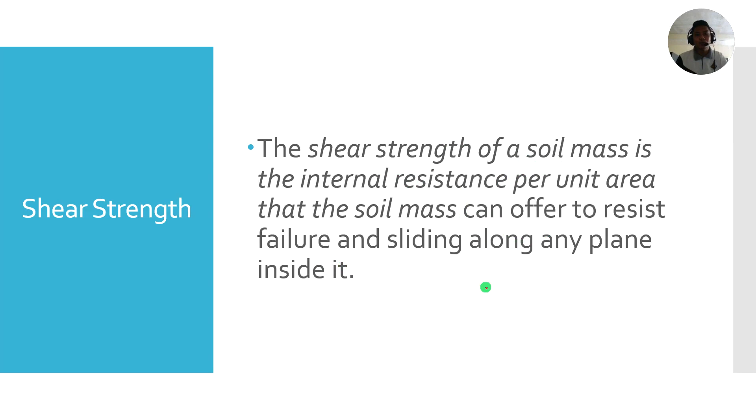I know you're familiar with shear stress. The shear strength, particularly in a soil mass, is the internal resistance per unit area that the soil mass can offer to resist failure and sliding along any plane inside it.

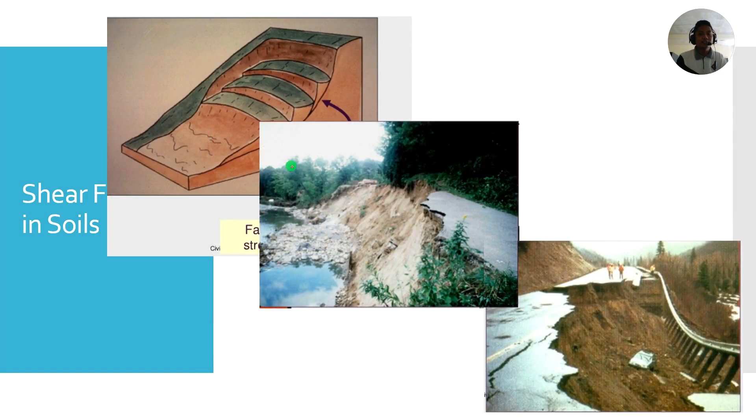These are the types of failures due to shear stress, such as landslides. The shear strength of the soil is a major factor in this phenomena. From the definition itself, it is the failure and sliding along any plane inside a soil mass, so there is sliding that happens in the soil mass.

The same way with structures built on soil, there is also an effect if that soil has a low bearing capacity. So shear stress again is a major factor on which a structure will fail due to bearing capacity.

Shearing stress pa rin ang magte-take effect sa soil. Magkakaroon ng sliding dun sa surface or dun sa underneath ng ating structure. Hindi man na-compress yung soil, depende sa type ng soil kung saan itinayo ang structure. Kung nag-fail due to bearing capacity, may tendency na magkaroon ng sliding sa surface ng soil mass.

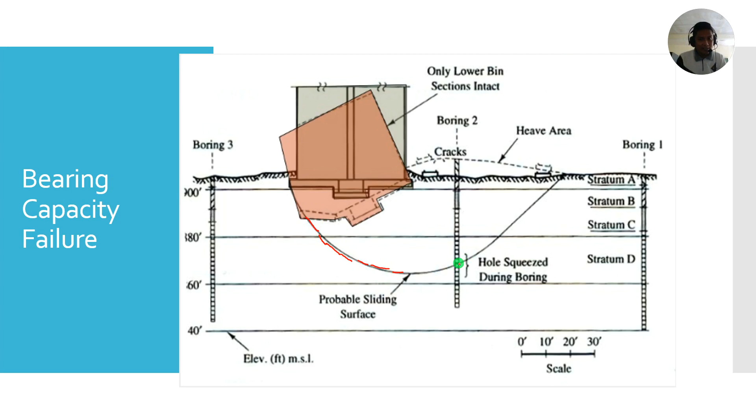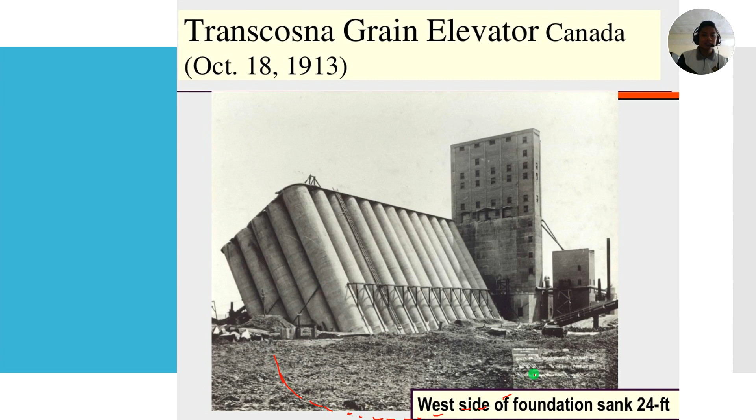So here's an example of bearing capacity failure. Shear stress failure siya. Nag-tilt itong building dahil nagkaroon ng sliding dun sa soil mass underneath this structure.

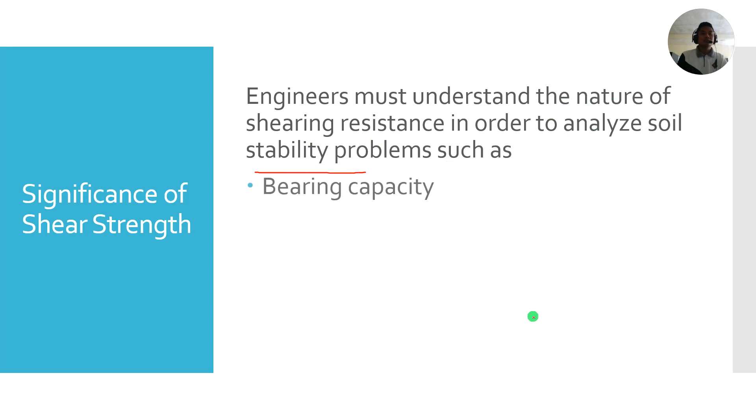Significance of shear strength: engineers must understand the nature of shearing resistance in order to analyze soil stability, such as bearing capacity, slope stability, and lateral earth pressure on retaining structures. Napakahalaga na maintindihan natin ang concept ng shear strength kasi essential siya sa paghahanap ng bearing capacity, ng slope stability, at sa pag-design ng mga earth retaining structures, kasama din yung pavement.

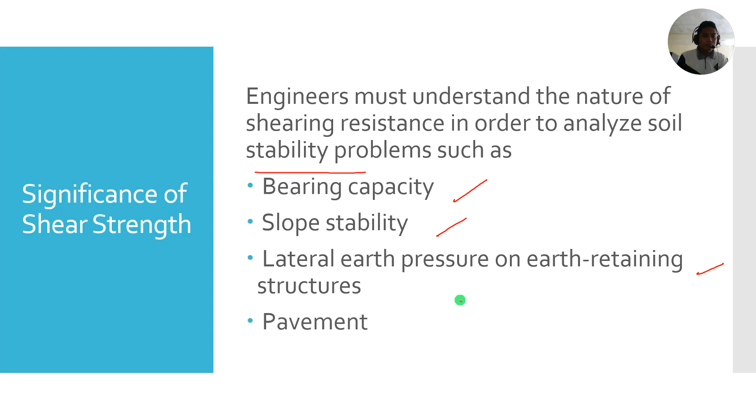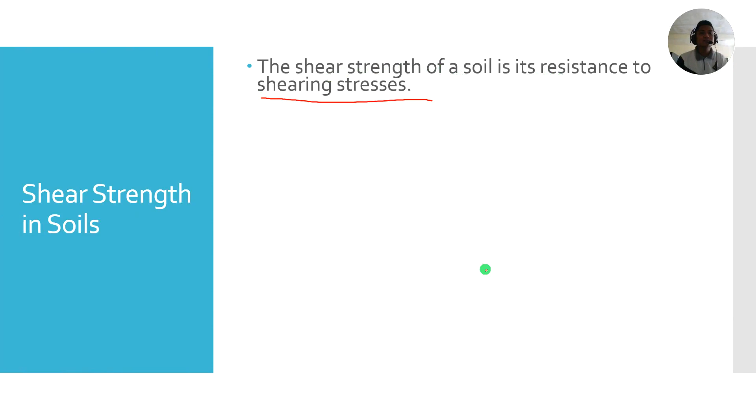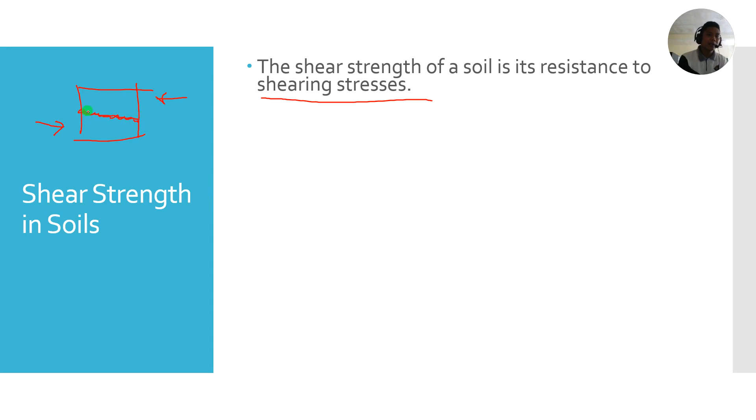Shear strength of soils: the shear strength of a soil is its resistance to shearing stress. Kung meron tayong force applied on an object, that causes a plane parallel to these forces to slide. Yung area na yon na parallel dun sa force, yun yung under sa shear stress.

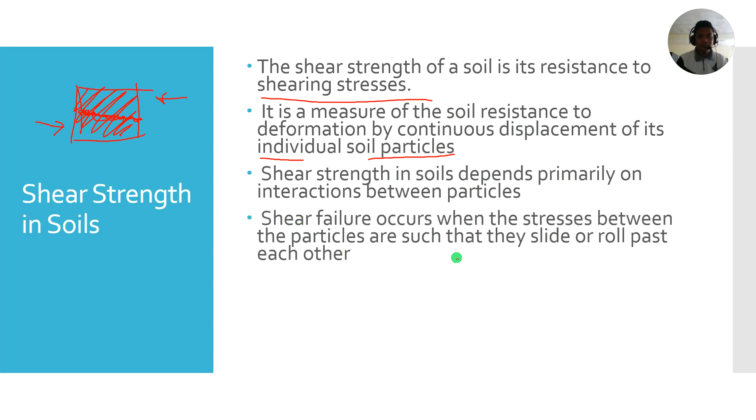Ganun din sa isang soil mass. So if this is a soil mass, the ability of the soil to resist shear stress is your shear strength. It is a measure of soil resistance to deformation by continuous displacement of its individual soil particles. Shear strength in soils depends primarily on interactions between particles, and shear failure occurs when the stresses between the particles are such that they slide or roll past.

As you can see in this figure, shear strength depends primarily on the interactions between the particles. So say these are the soil particles, there is interaction between them. But if it reaches the maximum shear strength or shear force applied on this soil, shear failure may occur, when the stresses between the particles are such that they slide or roll past each other.

That means they will slide on each other, in opposite directions within the soil mass, so that a layer forms between the soil mass where it will slide or split the soil mass.

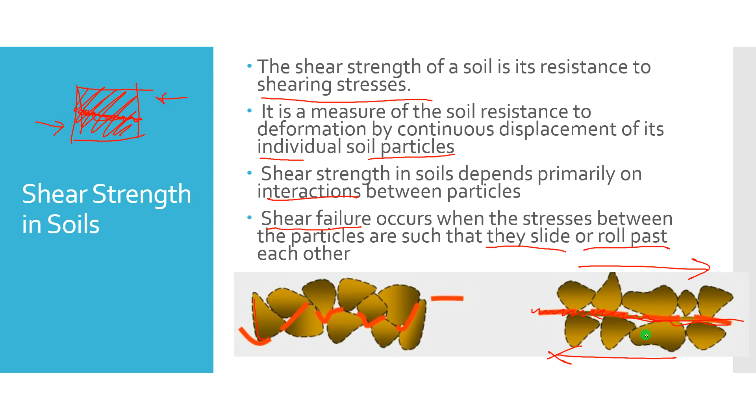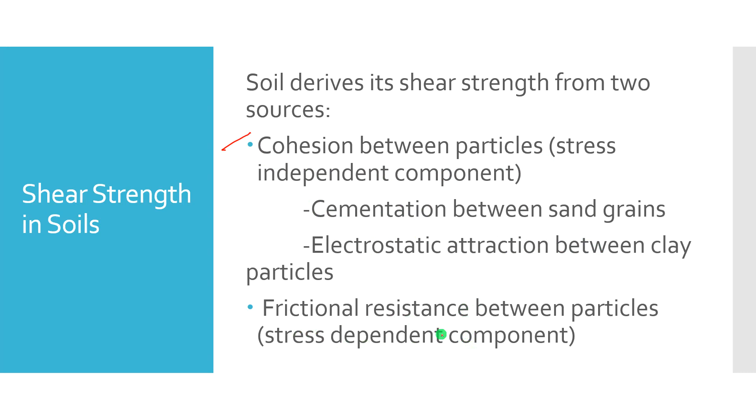So, soil derives its shear strength from two sources. Una, sa cohesion between the particles - it's the cementation between sand grains, electrostatic attraction between clay particles. Second one is the frictional resistance between particles or stress-dependent component. So again, due to cohesion and frictional resistance.

Cohesion is a measure of the forces that cement particles. Parang when we say cohesion, it is the ability of material of the same type to stick with each other, or for particles to stick with each other. Usually, ang mga example ng type of soil na sinasabi nating cohesive, parang medyo madikit na material yan - they have the ability to stick with each other.

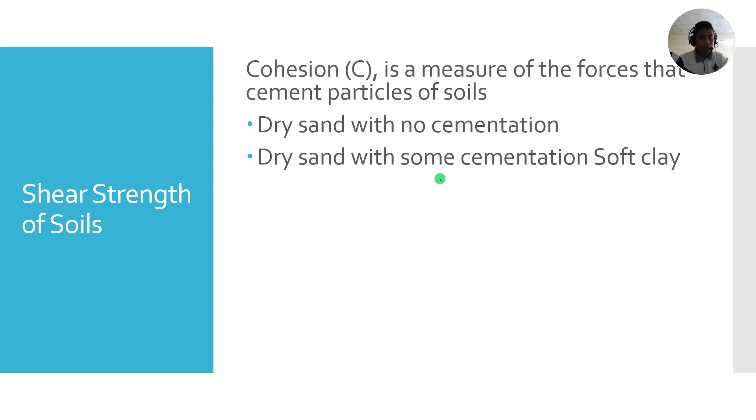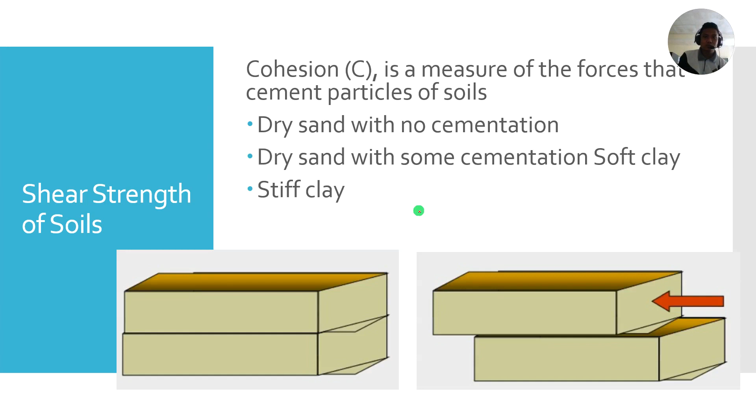So here are the examples: dry sand with no cementation, dry sand with some cementation, clay, then we have stiff clay. So cohesion contributes to the shear strength of soil.

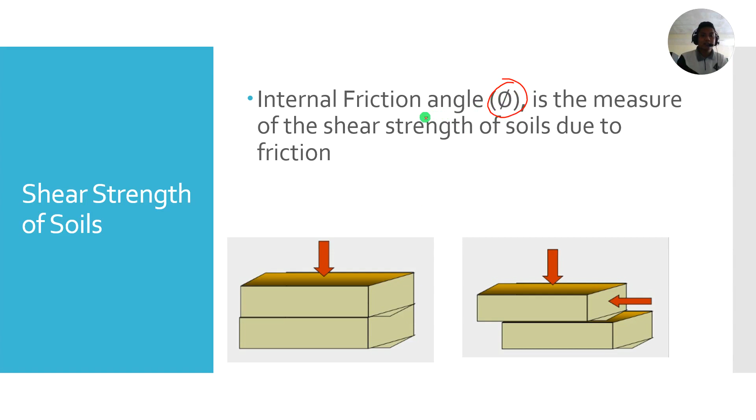The second one is the internal friction angle, or the friction between the particles when subjected to shear stress. Our symbol used for internal friction is phi, and we express that in angle, in degrees.

Mohr in 1900 presented a theory of rupture in materials that contended the material fails because of a critical combination of normal stress and shearing stress, and not from either maximum normal or shear stress alone.

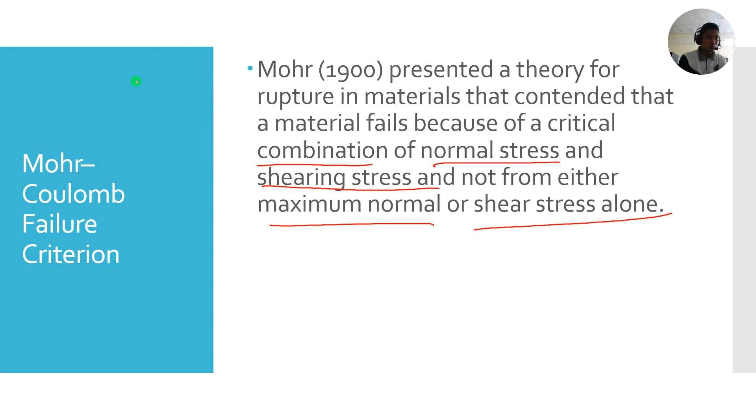So as we recall, normal stress is a force applied perpendicular to a certain area. In in situ stress, that's the value we can use in finding the normal stress on a soil at any depth. And we have shearing stress.

So to determine the maximum strength of a soil, according to Mohr, it is a combination of normal and shear stress. Later we will discuss using the Mohr circle, the theorem introduced by Mohr, to compute the maximum strength of the soil given that we have a maximum shear and maximum normal stress on the soil.

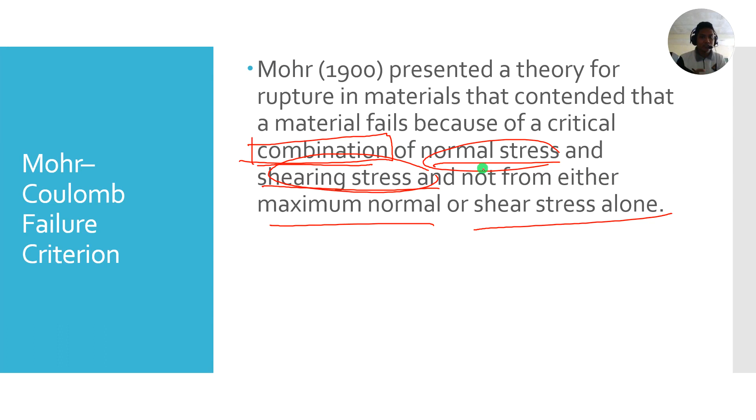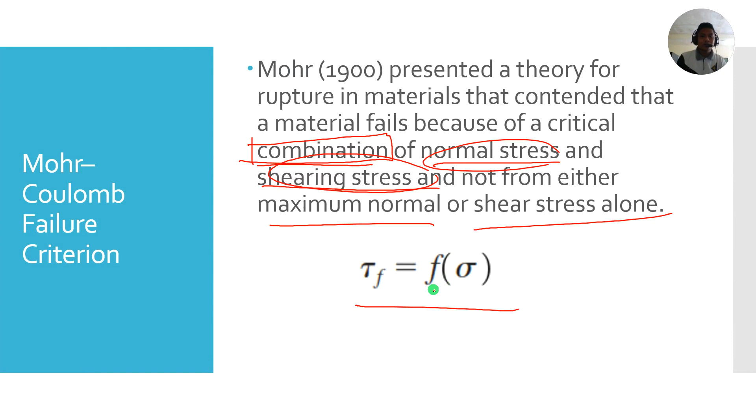So here in this lecture we will just focus on shear stress. Here's the general equation for shear failure: we have a function of sigma, or a function of the normal stress. For most soil mechanics problems, it is sufficient to approximate the shear stress on the failure plane as a linear function of normal stress.

So we can rewrite that, since we will express the shear strength or shear failure as a function of normal stress. If we have a cohesion, we will add sigma, or the normal stress, times tangent phi, for the angle of friction.

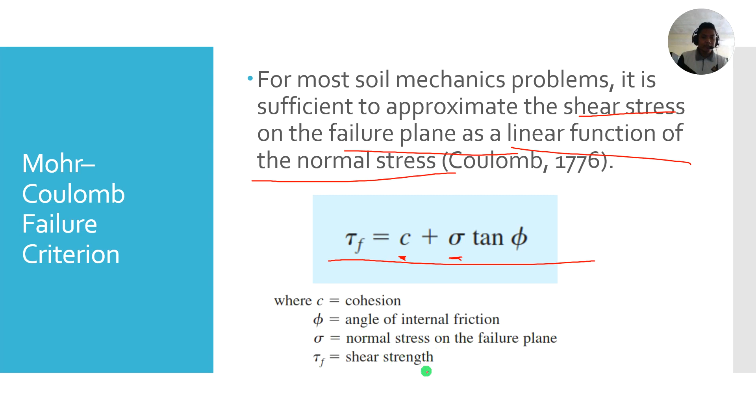So again, this is another general equation for computing the shear failure. Phi is the angle of internal friction, sigma is the normal stress on the failure plane, and we have the shear strength, tau f.

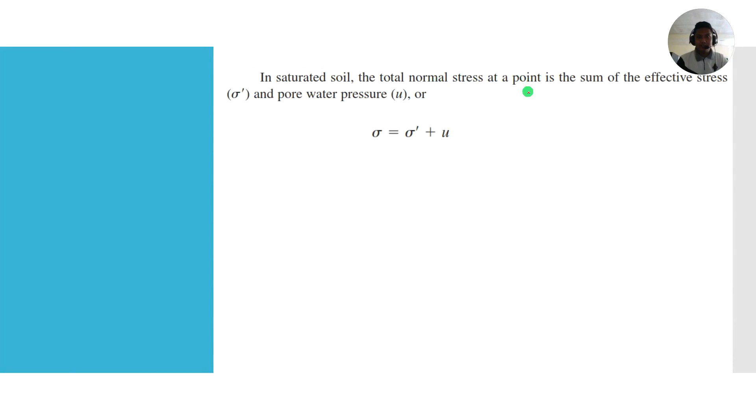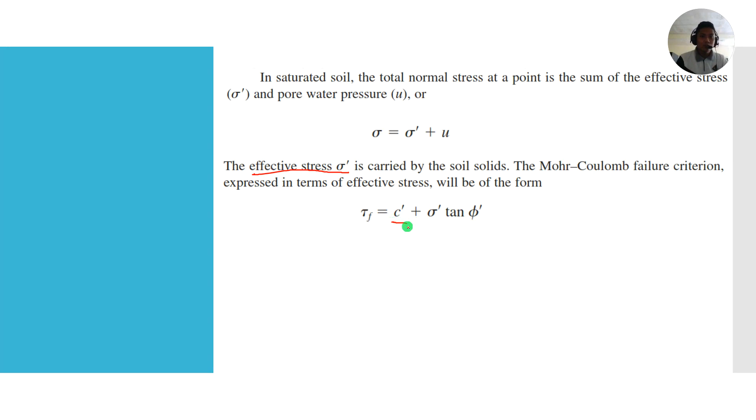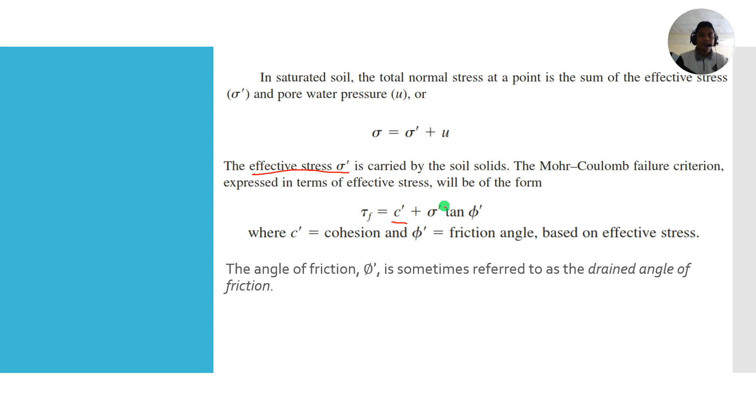So in saturated soil, the normal stress at a point is just the sum of the effective stress and the pore water pressure. If we are required to determine the effective stress, or the shear strength of the soil with regards to the effective stress, our solution is to take the effective stress, effective cohesion of the soil, and sigma prime, which is the effective stress of the soil, times tangent phi, or the angle of friction.

So here are the typical values of drained angles of friction for sands and silts. Usually these are the given values of angle of internal friction, but in some problems we have to compute these values.

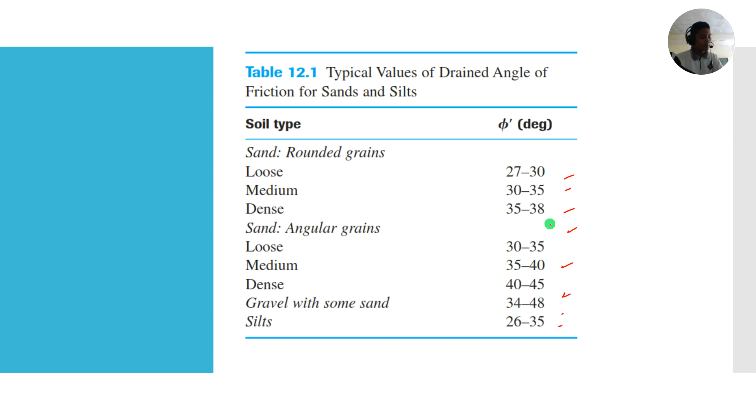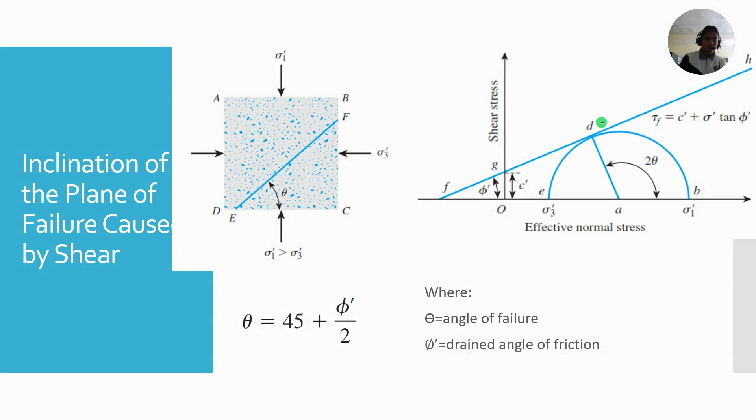But here, the inclination of the plane failure is caused by shear. So again, this is the Mohr circle. We will apply the Mohr circle in determining the values required on the soil. We'll just discuss this later in the triaxial test lecture, when we use the Mohr circle in determining the shear stress at failure, normal stress at the failure plane, and other values. So let's skip this for now.

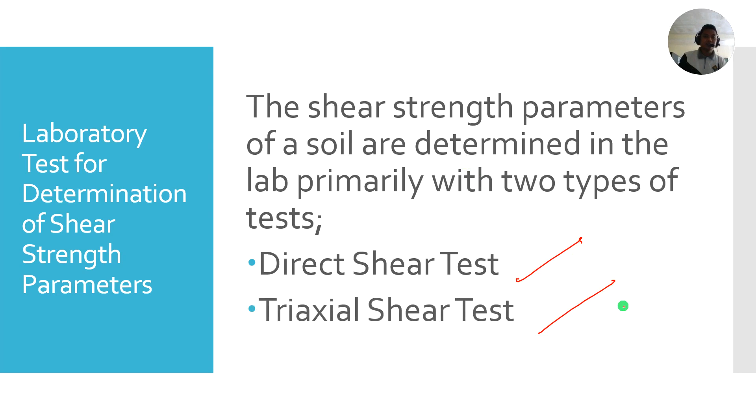So, laboratory tests for determination of shear strength parameters. We have two types of tests: the direct shear test and the triaxial shear test. These tests are used in determining the shear strength of a soil mass.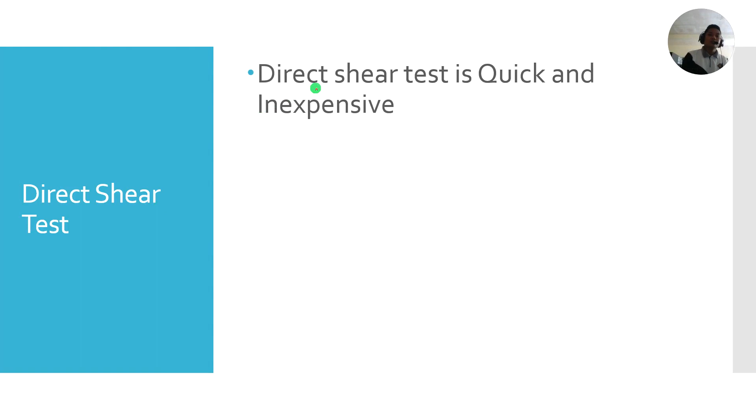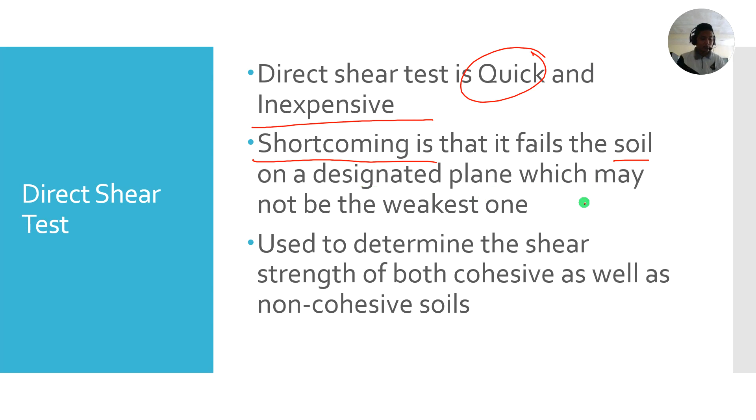So let's discuss the direct shear test. It is a quick and inexpensive way of determining the shear strength of soil. The shortcoming is that it fails the soil on a designated plane, which may not be the weakest one. It's used to determine the shear strength of both cohesive and non-cohesive soil. So that's the disadvantage of direct shear test, there is a slight inaccuracy in using it, unlike in the triaxial test. But again, this is the fastest way of determining the shear strength of soil.

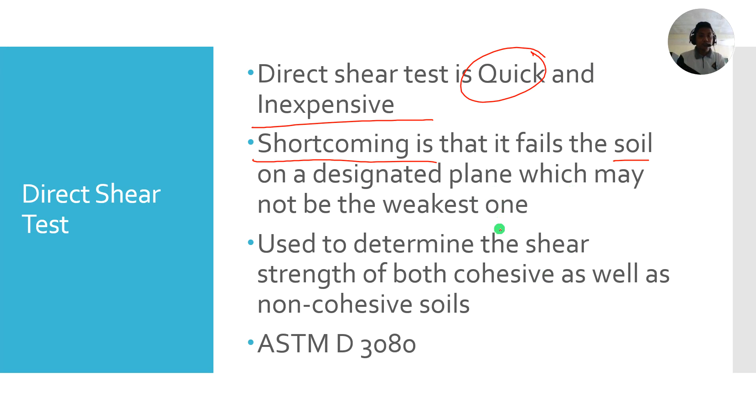So the test equipment consists of a metal box in which the soil specimen is placed, and then the box is split horizontally into two halves. So let's say this figure, that's your metal box. You put the soil, then there is a shear stress applied on the soil.

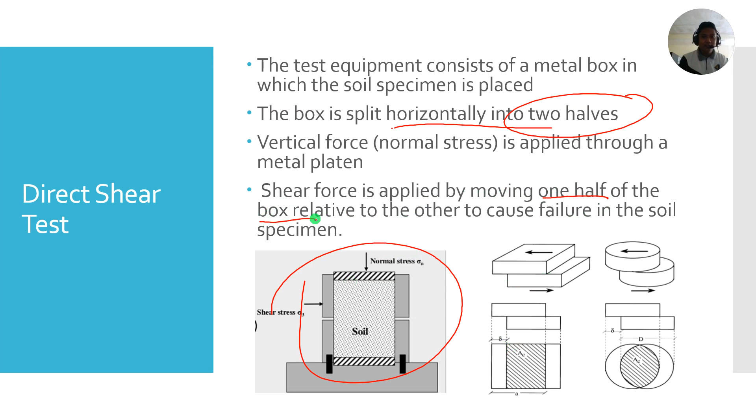So that's it, you will be able to determine the shear strength of the soil. Shear force is applied by moving one half of the box relative to the other to cause failure on the soil specimen. So these are the direct shear test apparatus. This one we have here on CSPC, this type of apparatus, the direct shear test apparatus.

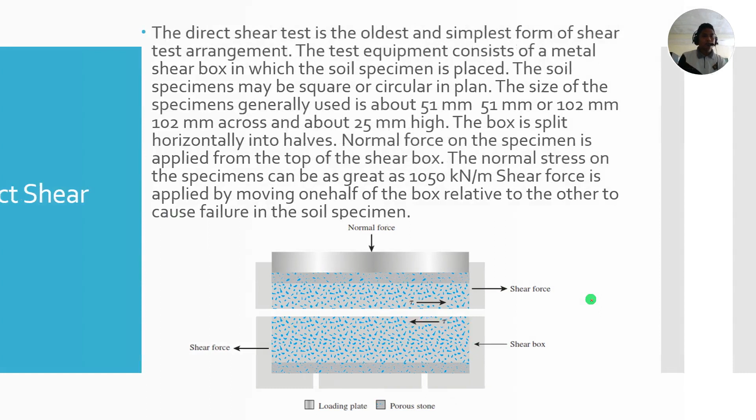Okay, so again, same procedure. You put on the metal box the soil, then apply shear force, a predetermined shear force, and from that we will be able to determine the shear strength of the soil. So there are many trials, the direct shear tests are repeated on similar specimen at various normal stress, varying predetermined normal stress applied to the soil.

So marami tayong trials na gagawin dun sa soil mass. Then hinahanap natin yung normal stress and shear stress dun sa soil na yun. Then we can now plot the points kung saan yung location ng normal stress at shear stress dun sa trials na yun. And after plotting those points, we will draw a best fit line that is close enough to traject yung points na na-plot natin dun sa mga trials sa direct shear test.

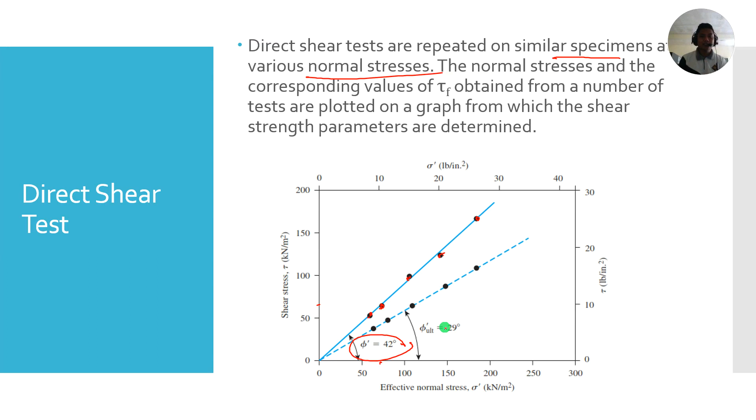So from that, we will be able to determine the angle of internal friction of the soil. Ang angle of internal friction kasi class, mahalaga siyang property ng soil na dapat nating mahanap. Kasi necessary siya sa pag-design ng mga structures, mga retaining structures.

Sample problem. The direct shear tests were performed on a dry sandy soil. The specimen is 50 mm in diameter and 25 mm in height. Test results were as follows. Determine the cohesion and angle of internal friction.

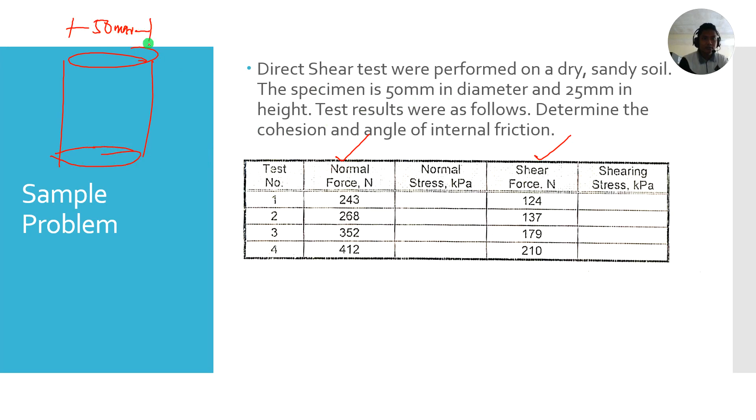So let's say we have given here the normal force and shear force. So the mold for the direct shear test is a cylindrical type of mold because we have here diameter of 50 mm and height of 25 mm. So again, if this is subjected to normal force, our area is this one. The same with shear force, the area should be parallel to that force.

So this area here, our area is pi r squared, or we have a diameter 50 mm. So pi d squared over 4. So substitute lang natin yung d. Convert that to meter, that's 0.05 meter raised to 2, divided by 4.

So pi d squared, 0.05 squared over 4. So that area is 0.00196 square meter, very small. So let's store that in A.

Okay, so to determine the normal stress, normal stress is just force over area. Force over area, the normal force, which is this one.

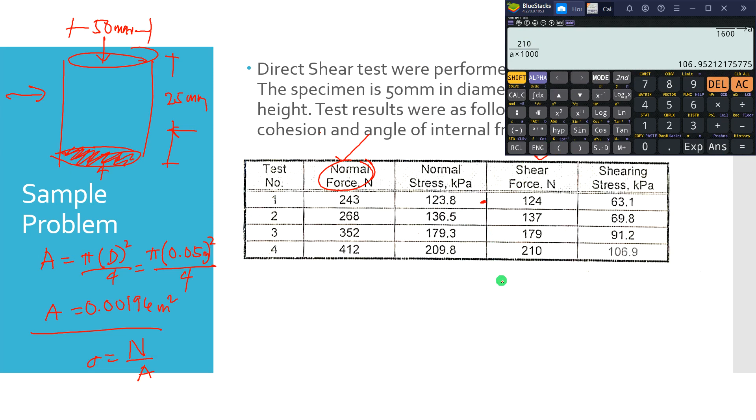Okay, so these are the values of your normal stress and shear stress. So we will use these values for trial 1, 2, 3, and 4 in plotting the normal and shear stress points on this trial.

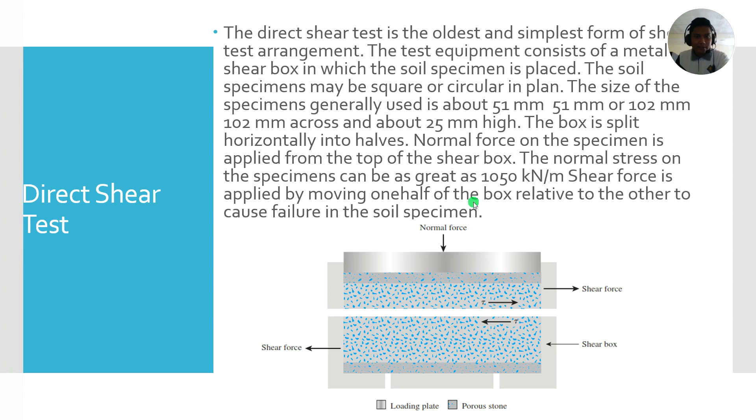So again, how do we plot this? Going back on this lecture. Okay, so balik.

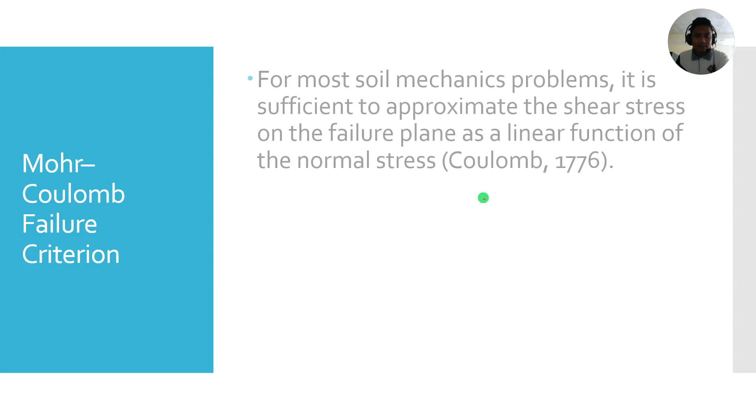Okay, so let's plot these points on the graph. So how do we find the internal friction and cohesion? When a soil has no cohesion, if we plot a best fit line through the points of normal and shear stress, this is the line we get when we connect them, or we make a best fit line through the points we made.

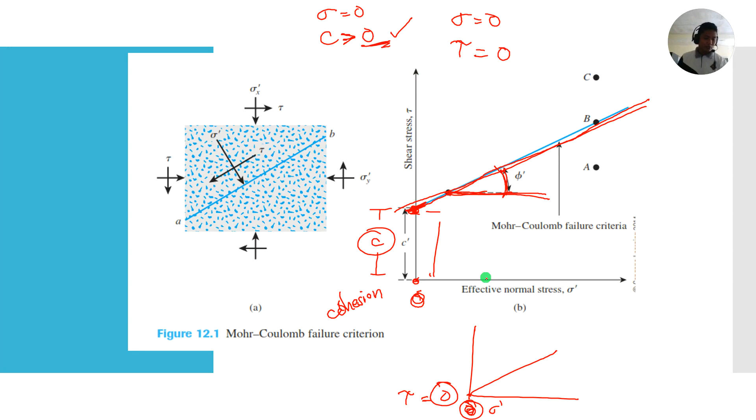So again, the value of cohesion is: if the normal stress is zero and there's a value for shear stress greater than 0, that means the soil is cohesive. But if at normal stress 0 the shear stress also equals 0, that means we have no cohesion. So again, going back to our sample problem.

If we plot this: test 1, 123.8, and 63.1 — test 1 is here, let's say 123.8 and 63.1, that's the y value. For test 2: 136.5, 69.8. Same with test 3 and test 4.

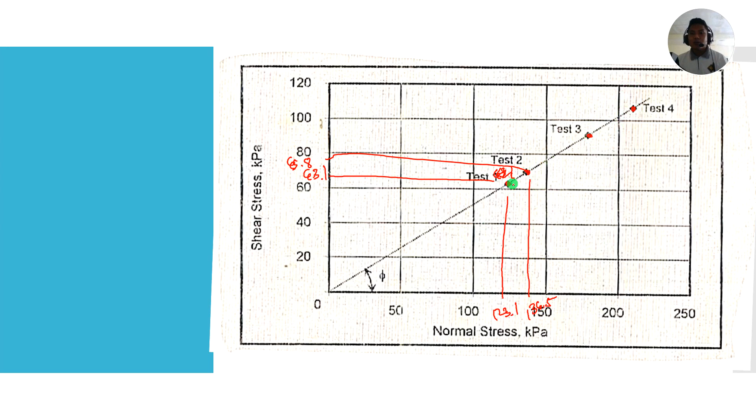So again, if we already have these points, just plot the best fit straight line between them, and the line is this. So based on the drawing of this line we formed, it intersects the point of origin, where normal stress is 0 and shear stress is 0. That means, since cohesion is one of our requirements, the cohesion here is 0.

Next, for the angle of internal friction, we will make a right triangle formed by this line. Since the line hits all the points of our tests, we can just select any point. Let's say I pick this point that was actually hit by the best fit line we drew. So say this triangle here — we use test 3.

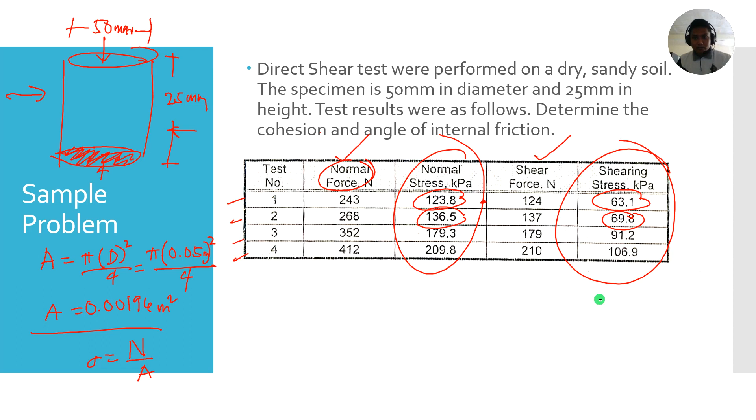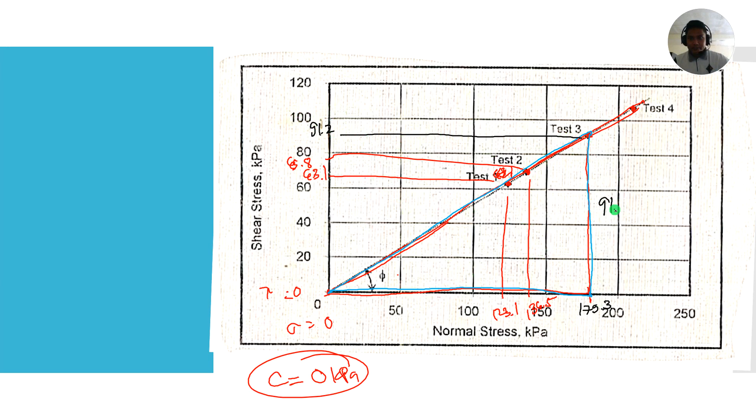So the values for normal stress is 179.3 and 91.2. So 91.2 is the vertical distance, and 179.3 is the horizontal distance from the origin. Based on this right triangle we formed, we can just use the tangent function: tangent phi equals opposite over adjacent, 91.2 over 179.3. So that means, phi equals arctangent of 91.2 over 179.3.

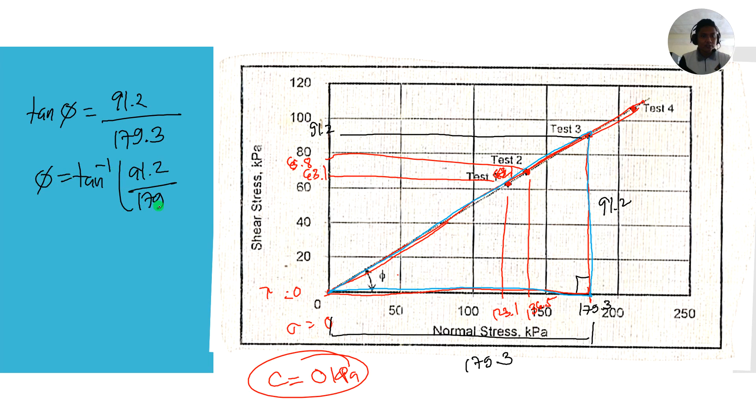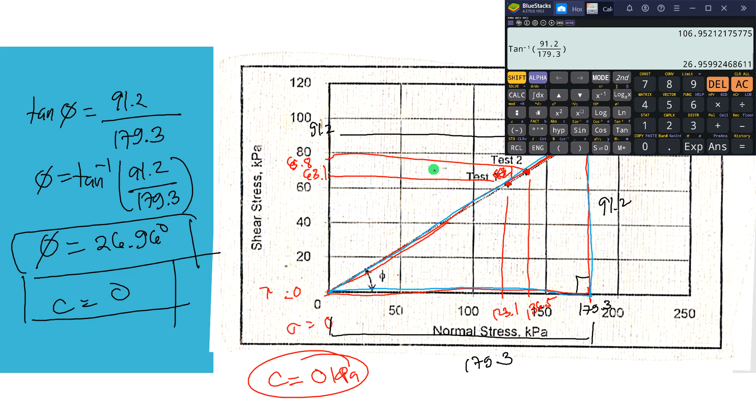So our angle of internal friction is arctangent of 91.2 over 179.3, which gives the angle of internal friction as 26.96 degrees. That's the answer. So we have 0 cohesion and an angle of internal friction of 26.96 degrees. That's how we solve a problem in direct shear test.

Next problem: A direct shear test is performed on a specimen of dry sand. The shear box is circular in cross-section with a diameter of 50 mm. The normal force imposed on the specimen is 250 newtons. The shear stress is determined when the shear force is 150 newtons. Determine the angle of internal friction. Here, there is only one trial applied on the direct shear test, but that's enough to determine the shear strength and normal strength of the soil, as well as the angle of internal friction. So let's solve this.

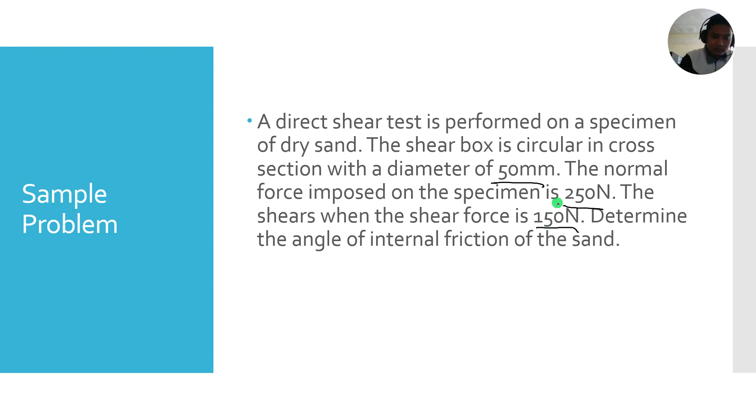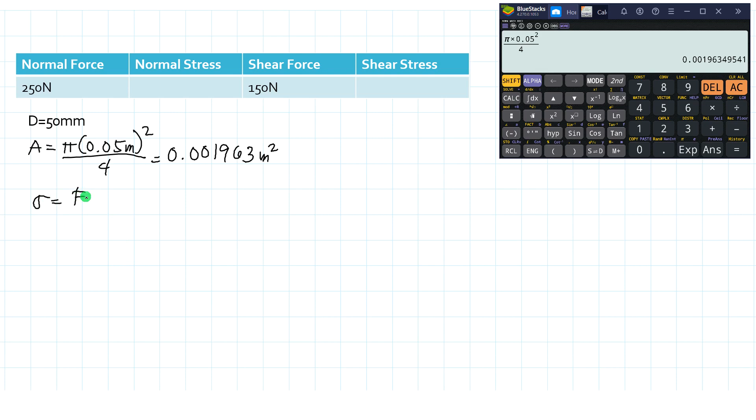Let's compute the cross-sectional area, given the 50 mm diameter. Convert that to meters first: 0.05 meters squared over 4, so pi d squared over 4, equals 0.001963 square meters. So the normal stress equals force over area: normal force 250 newtons over the area of 0.001963. I will store this as A so we have an exact answer.

250 over the area equals 127,323 newtons. If we convert that to kilonewtons, we just divide by 1,000. So let me write, 127,323.95 newtons.

Or, in kilonewton, divide by 1,000, we get 127.324 kilopascal. So this is in square meter, Newton per square meter, that's in Pascal. Or divide by 1,000, turns out to be kilopascal.

So for the shear stress, we have shear force over area. We have 150 newtons over the area, 0.001963 square meter. So we have 150 divided by area, which gives us 76,394.37 Pascal, or 76.394 kilopascal. So that's the answer for normal stress and shear stress.

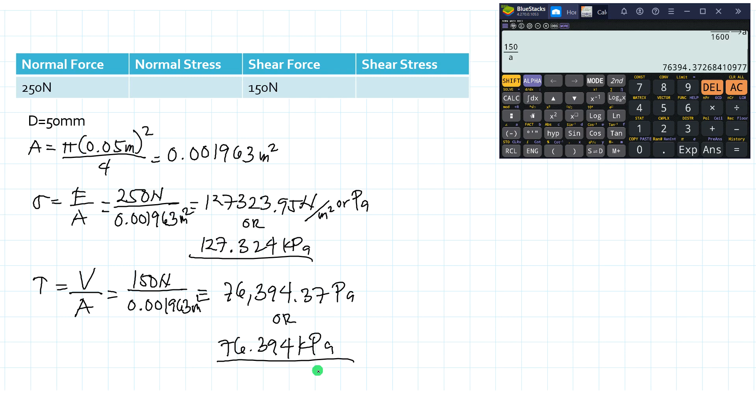So how do we plot this? If we are going to plot the point of normal stress of 127.324 and 76.394, let's say it's right here. So the location of that point is right here.

The problem does not mention finding the cohesion, and since we only have one trial, we assume here that there's no cohesion, zero cohesion here. So we will just connect that to the origin where we have zero normal stress and zero shear stress.

So we can now identify the angle of internal friction. Again, this vertical distance here is 76.394 and our horizontal distance is 127.324. So to compute the angle of internal friction, use the tangent function and take the ratio of the opposite over adjacent: 76.394 over 127.324, or phi is arctangent of 76.394 kilopascal over 127.324 kilopascals.

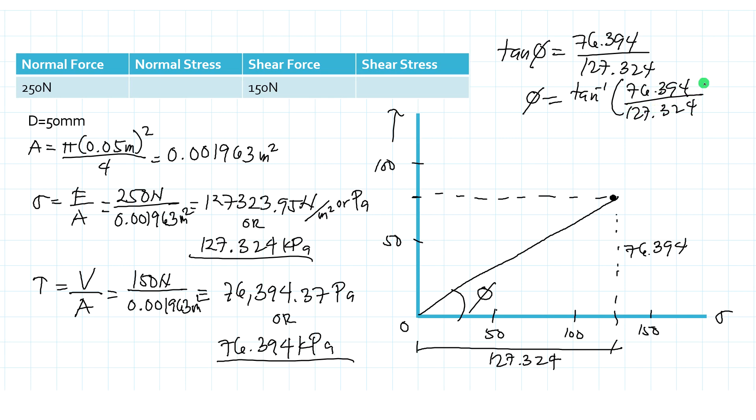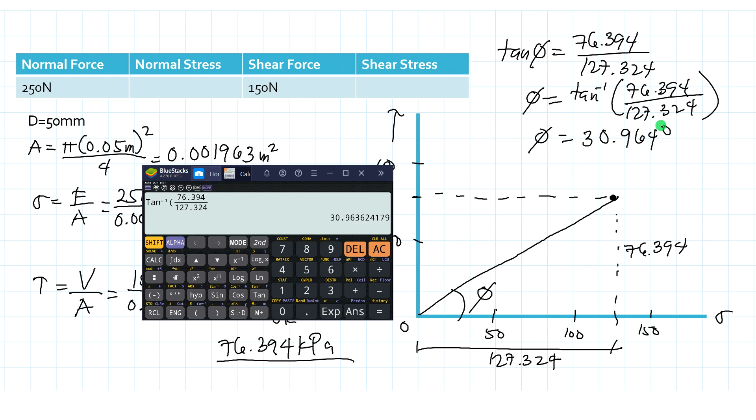The unit kilopascal cancels out, so we have a unit of degrees. So let's compute that: arctangent of 76.394 over 127.324. So the answer is 30.964 degrees. That's the answer for the angle of internal friction.

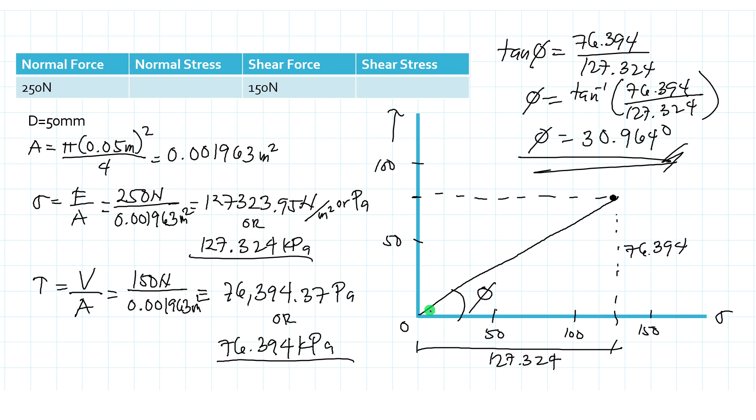So next, the following are the results of a direct shear test performed on two identical samples of soil. In test 1, the sample sheared at a stress of 71 kilopascal when the compressive normal stress is 95. In test 2, the sample shear is 104 and the normal stress is 150 kilopascal. Determine the cohesion, angle of internal friction, and determine the shear stress at a depth of 4 meters if the unit weight of the soil is 15.6 kilonewtons per cubic meter.

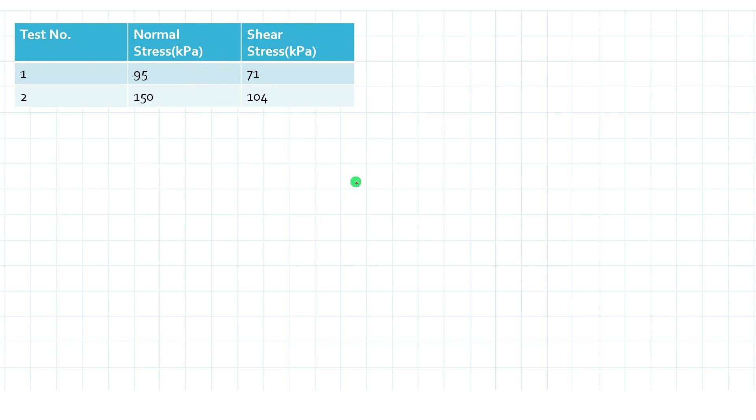So let's solve this problem. Let's make a table for the test number and its corresponding normal stress and shear stress. Now, if we are going to plot the best fit line for these values, let's locate test 1, which is right here, and test 2 here, locating the points. If we draw a line between these two points and extend it, we might have a value of cohesion.

So if there are two or more tests, there's a chance that we have a cohesion value here. But if, when we make a straight line drawing a best fit line for the points of each trial, it intersects the y-axis where the normal stress is 0, and if there is a value for the shear stress there, there is a cohesion.

So here, we will not use the graphical solution or just estimate the value for the cohesion. Instead, we will compute the value for cohesion since we have the data. So the best solution in computing the cohesion is that we will interpolate.

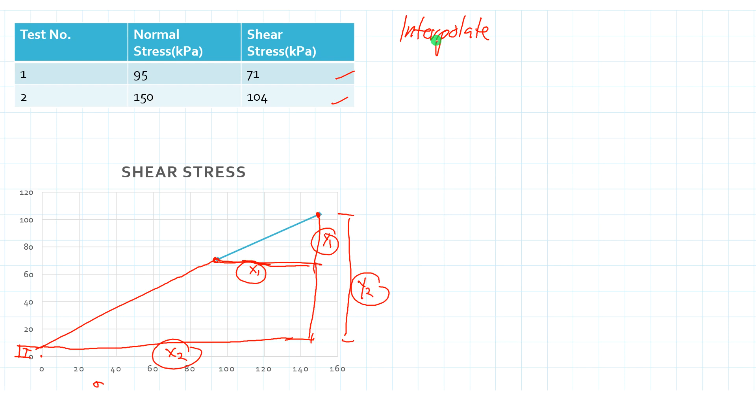So if we form right triangles here, these are similar triangles. By interpolation, we just take the ratio and equate the ratio of the sides of our triangle. So if we take the ratio of the vertical side, y1 over x1, that equals the ratio of the vertical side of the bigger triangle, y2 over x2.

So y2, y1, x1, we'll get these from our values of normal and shear stress. So y1, this vertical distance, we get by taking the difference of the shear stress of test 2 and test 1. So our y1 is 104, since that's test 2, minus the one from test 1, to get our total vertical distance: 71 over x1.

Total horizontal distance from test number 1 to test number 2. So subtract ulit yung normal stress naman, 150 minus 95, that's equals to x1. So itong x2 na to, hindi pa natin alam class, but if we have C here...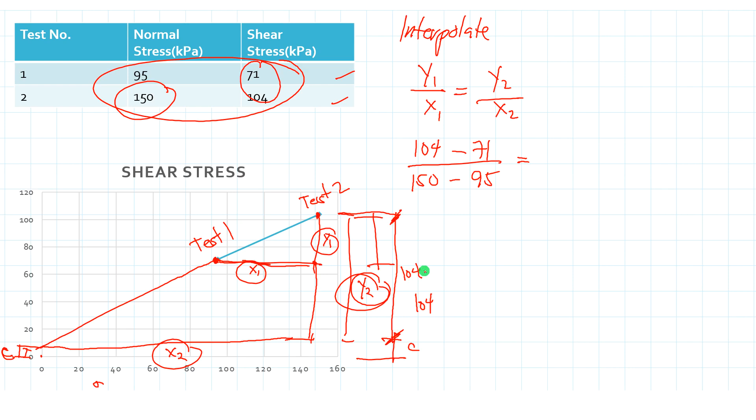We can say that test 2 has total vertical distance or vertical shear stress which is 104, so when you subtract C, ang makukuha natin ay itong vertical distance na to. So therefore that's 104 minus C. So 104 minus C, yung total vertical distance natin from this point, interpolate natin kung in-intersect ng line natin yung value ng cohesion.

Over x2, total horizontal distance. So syempre yung test 2 yung pinakamataas, kaya normal stress ay 150, so C na lang ang unknown. We can solve this now. Ang goal lang naman natin talaga dito class ay hanapin yung equivalent shear stress at zero normal stress. Sige, let's solve this. If we will directly use our calculator, we can solve that.

But let's solve muna natin. Minus 71 over 150 minus 95, that's 0.6. 0.6 equals to 104 minus C over 150. So 150 times 0.6 is equals to 104 minus C. 150 times 0.6 is 90, so 90 minus 104 equals to negative C. 90 minus 104 is negative 14, multiply both sides by negative 1, we have 14.

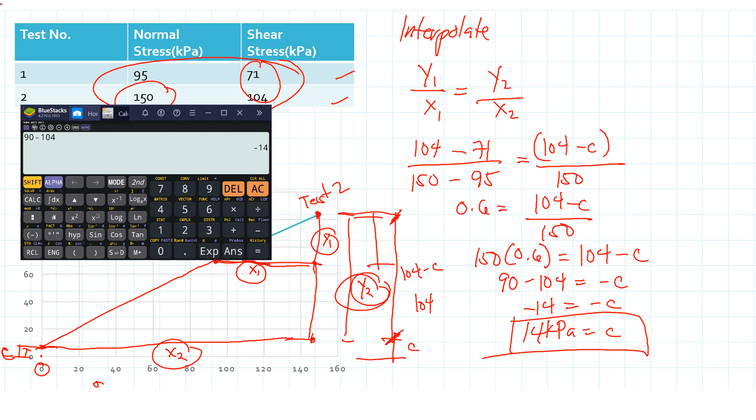The unit is in kilopascal, so the cohesion is 14 kilopascal. Okay, so that's how we solve the cohesion.

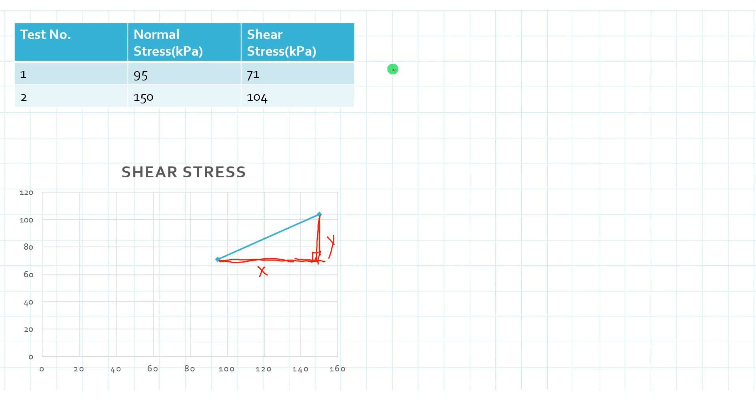Next one is we determine the angle of internal friction. So for the angle of internal friction, we can use again the value for normal and shear stress. From that we just determine the vertical and horizontal distances of this right triangle formed by this line. So again lang natin class, tangent phi, kasi ito yung ating angle of internal friction.

So yung y natin, difference sa shear stress, 104 minus 71, over 150 horizontal naman minus 95. So kanina sinolve na natin yun, that's 0.6 sa calculator. So arc tangent of 0.6 is 30.964 degrees. So that's the solution for the angle of internal friction.

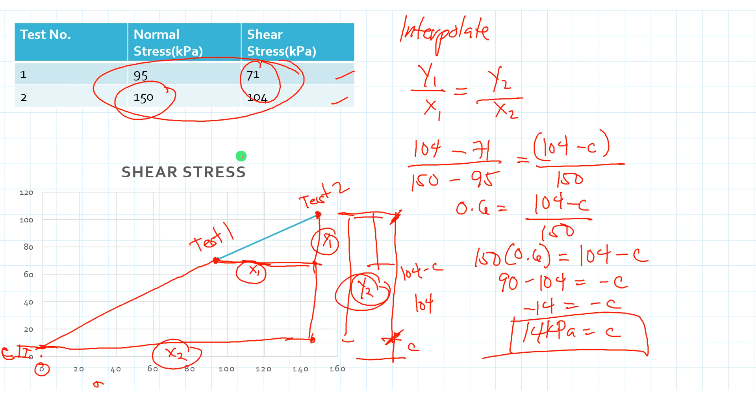Ito na naman para sa cohesion. Sa cohesion, kapag merong given na 2 or more na test, mag-interpolate na lang tayo. At para naman sa angle of internal friction, use the tangent function.

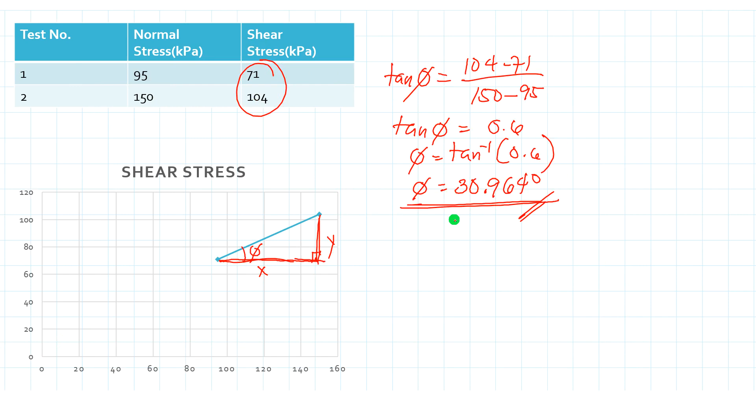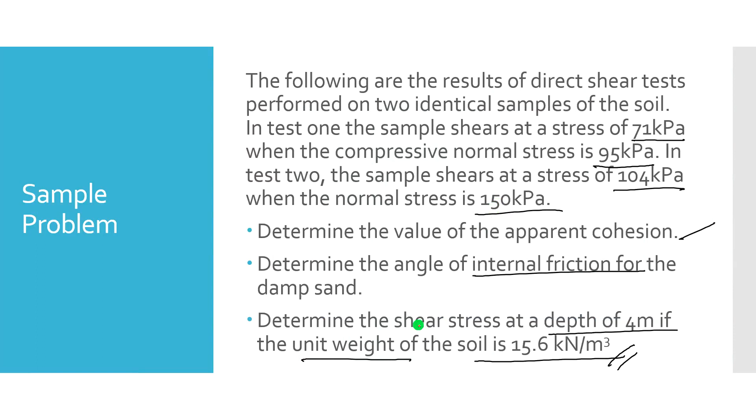Okay, so the last question is determine the shear stress at a depth of 4 meters if the unit weight of the soil is 15.6 kilonewtons per cubic meter. For the last question, we will determine the shear stress at 4 meter depth given yung unit weight ng soil. So going back sa lecture natin sa in situ stresses, ang makukuha natin doon ay yung normal stress ng soil at a given depth. So kung meron tayong 4 meters, total stress natin ang makukuha dyan.

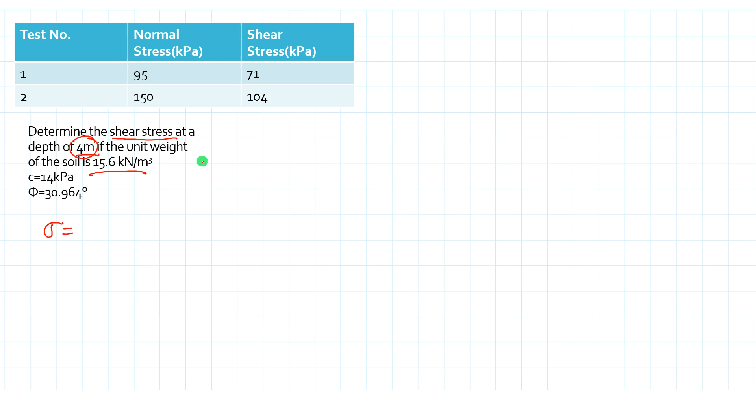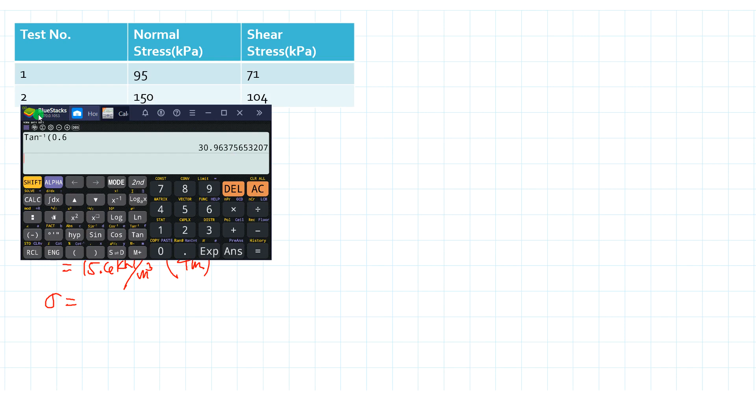Di naman sinabi na saturated or hindi, so we can just simply determine the normal stress, which is the product of the unit weight of soil times the height. So the unit weight is 15.6 kilonewtons per cubic meter multiplied by h, which is 4 meters. So 15.6 times 4 is 62.4 kilopascal.

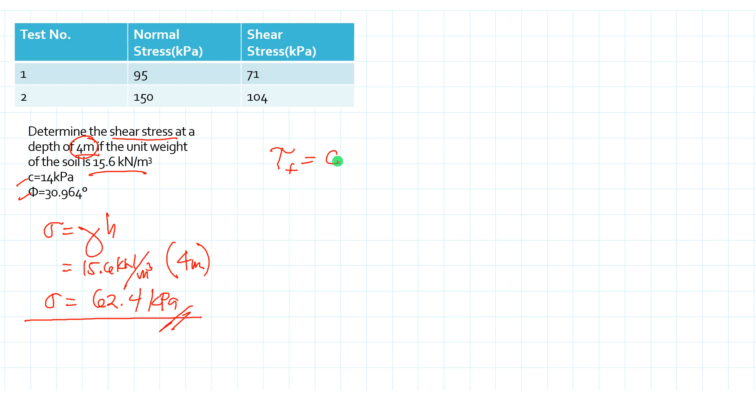Okay, so after determining the normal stress, since we already determined the cohesion and angle of internal friction, we can now determine the shear stress of the soil at any point. So going back sa main general solution natin sa paghahanap ng shear strength ng soil, it is just equals to the cohesion plus sigma or the normal stress times tangent phi. So yan ang general solution natin sa paghahanap ng shear strength. So C therefore is 14 kilopascal.

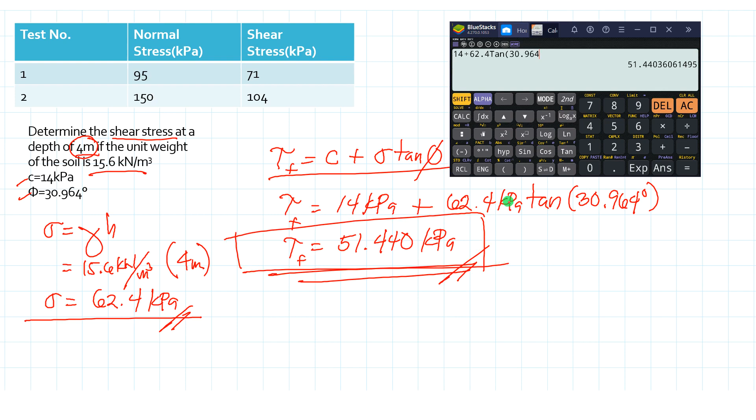Make sure that consistent tayo sa unit. And we have 30.964 in degrees also. So 62.4 kilopascal, tangent of 30.964 degrees. So the shear stress at a normal stress of 62.4 is, compute natin, 14 plus 62.4 tangent 30.964. So the answer is 51.440 kilopascal. So yun class, that's the answer for the shear stress at a depth of 4 meters.

So first, find the normal stress, then apply it to this solution right here. Okay, so that ends our lecture for shear stress in soil.

So mainly we focus on direct shear test. So on the next lecture, I will be discussing triaxial test. So how do we solve problems which uses triaxial test? These problems on triaxial test always appear in the board exam.